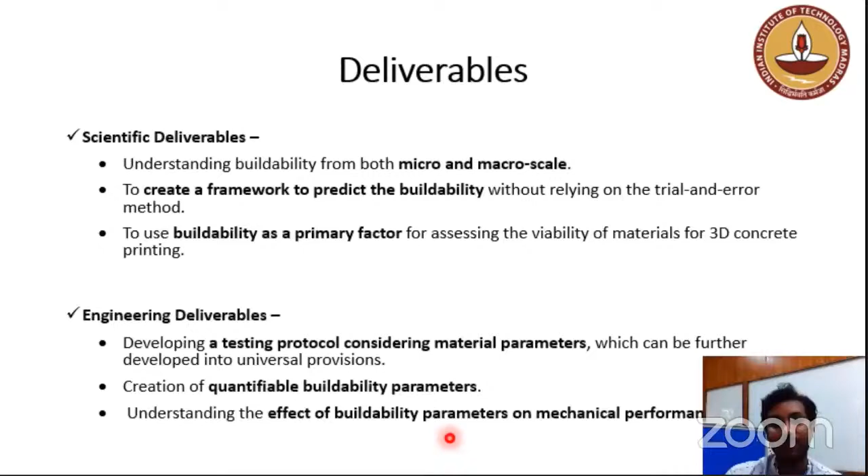Now, the engineering deliverables are to have a testing protocol considering material parameters, to have quantifiable buildability parameters, and to see the effect of buildability parameters on mechanical performance or strength performance of the structural part. So the basic objective of the total study is, again, to understand the fresh state and the material parameters that are critical for buildability.

To use different admixtures like accelerators, to increase the buildability or decrease the deviations we can get while printing it.

From microstructure, we can understand the microstructural evolution with the material parameters that are critical for buildability. To introduce sustainable binder systems that have good properties, like yield stress, that can help us have a stiff mix to hold or support a proper built structure. Systems like calcium sulfoaluminate or limestone calcined clay cements can increase the aggregate-to-binder ratio, giving higher strength and a stable solution.

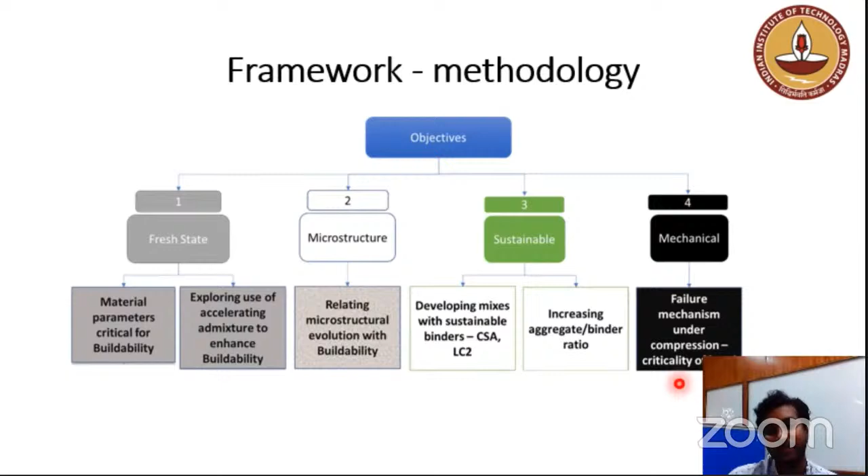And at the end, to understand the failure mechanism—how the criticality of the layers and the bonds is going to play the major role.

So to come to the work progress, the first thing we have done is develop a test method to design a printable mix. I'm not showing it here, but we have developed a whole test protocol to design the printable mix, and if we follow it, we can achieve it.

So we have moved from not-so-well printable structures with deviations to much finer structures that we have printed over time, learning to assess the material parameters and create proper mixes that can be printed in a better way.

Now, to print well built-up cubes using different chemical admixtures is also critical, and to develop a new method to enhance buildability post printing. So we have printed this toilet module using a novel method of spraying accelerator on the surface, which we used to increase the buildability of the structure so that it should not collapse.

So suddenly if something is out of the way, we can use this technique to hold the system, or to freeze the system at that moment, and then rely on building further structures on it without creating a larger deviation or a failure. The next is to print well-shaped cylindrical columns.

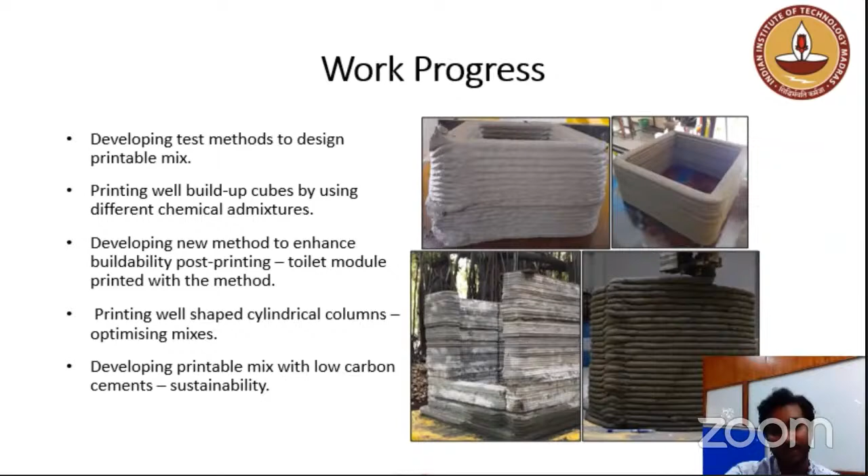We have optimized the mix and created much better columns of half a meter, one meter, in one go. To develop printable mix with low carbon cements like LC2 and CSA, it is under study and being done in the lab now.

Will be taken to the printing trials soon. If you see further, this is the 30-minute building that is there in IIT Madras that we have created using these different technologies, and this is how we have learned to use the accelerating admixtures, from a structure that cannot hold more than 4 to 5 layers to a structure that can go to 600 millimeters or 1 meter in one go.

Also, in different ways how we have added the admixtures like chemical accelerators, we have found out different methods and quantified them and compared them with each other to find out what is the suitable method to do it - to add it at the nozzle, to add it at the mixture itself, or to spray it on the surface post printing to avoid any kind of collapse if there is any problem that has occurred due to printing.

Further, the work in progress is to understand and define the mechanical testing procedure on the hardened state, to have hollow cylinders, to have walls, to understand how the cracks are propagating through the horizontal joints, and whether the vertical joints are critical, the horizontal joints are critical, the layer bonds are critical.

To understand all those things is under progress at this moment, and to increase the sustainability of the printable mix using different binders that is already told to you. The last thing we are also trying to understand is the rheological and mechanical performance under different loading conditions, like binders, admixtures, and all these things.

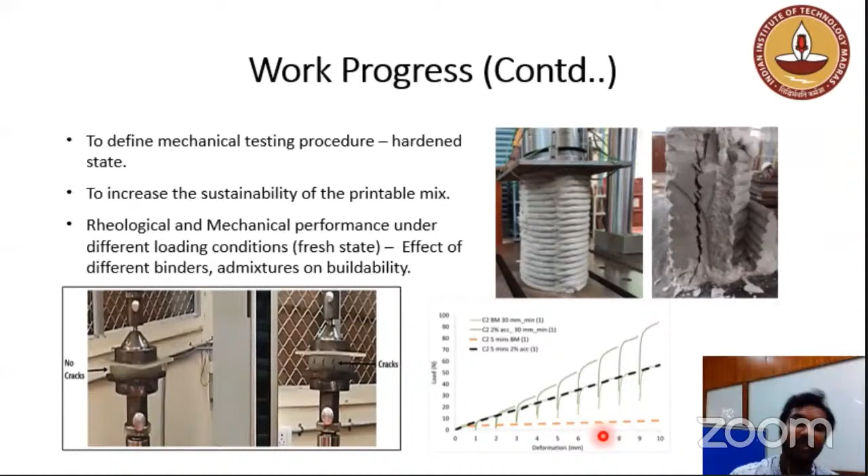So this is a squeeze flow method that we are using to understand the behavior of the mix. We go for direct compression, stepwise compression, cyclic compression, to understand how these accelerators and other things affect the material behavior.

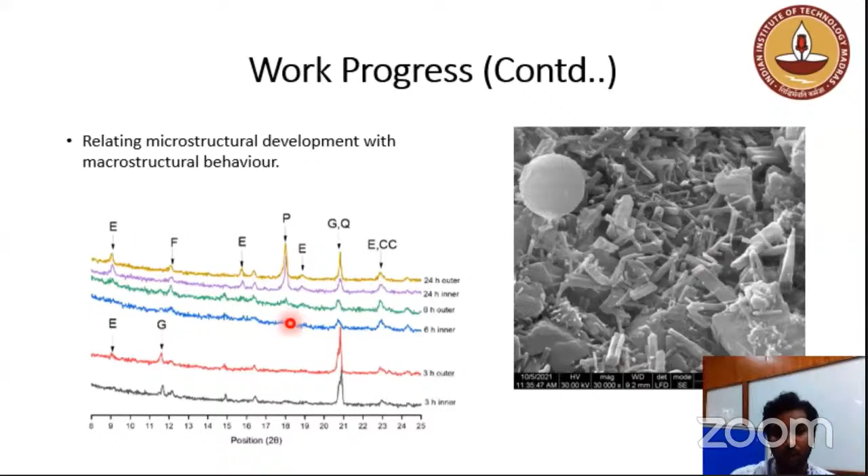So the furthest thing we're doing is to understand the microstructural development, XRD and SEM, to see how the formation of ettringite, formation of CSH, and other things are critical for the macrostructural behavior, or the rheological behavior, and how we can tweak the microstructure. The aim is to know how to tweak the microstructure for better macrostructural performance.

This is the visible output. Thank you.

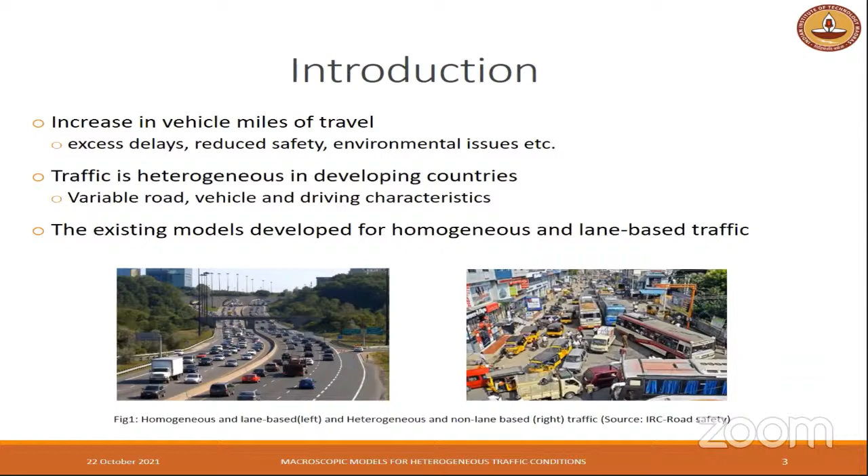So over the years, researchers have developed multi-class models and non-lane based models to accommodate vehicle class heterogeneity. The macroscopic model consists of two main concepts: one is the fundamental diagram, another is the state propagation equation. The fundamental diagram is the steady state relationship between traffic flow variables - speed, density, and flow.

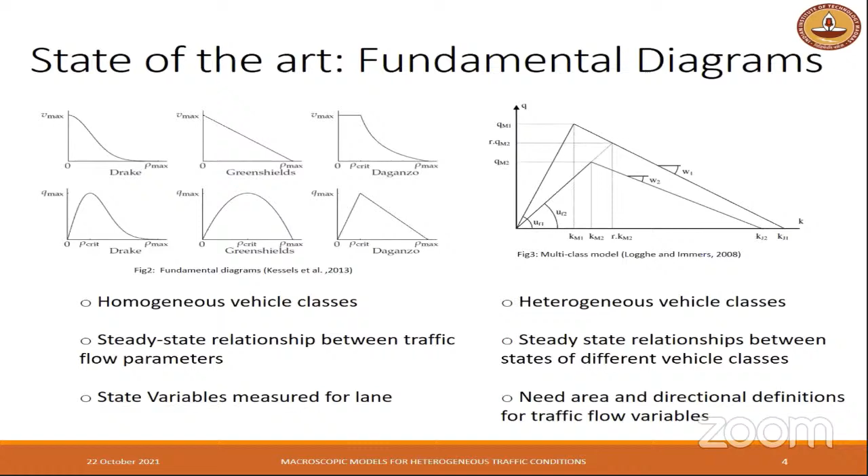The state variables, the traffic flow variables measured for this fundamental diagram, are lane-based. Logghe and Immers proposed a steady state relationship between states of different vehicle classes, called the multi-class model. This is the heterogeneous vehicle class fundamental diagram. But for both cases, we need area and directional definition traffic flow variables, because both fundamental diagrams were developed for lane-based traffic.

The state propagation equation is the traffic flow model. Lighthill, Whitham, and Richards first proposed the kinematic wave model in 1955. The kinematic wave model consists of the continuum equations and the fundamental diagram. The solution of the kinematic wave model gives how the traffic state propagates in the time-space domain.

The first order model, the kinematic wave model, is able to predict state propagation, wave formation, and traffic dynamics at stationary and moving bottlenecks, but can't explain capacity drop, hysteresis, relaxation, and platoon diffusion traffic phenomena. So over the years, higher order models were developed to explain capacity drop, hysteresis, and relaxation and platoon diffusion, which are the drawbacks of the first order kinematic wave model.

This model considers only one direction, the x direction, for traffic state propagation. Lateral movement is not considered in this model. The model does not consider lateral movement and non-lane-based movement. So we need a robust model for mixed traffic conditions.

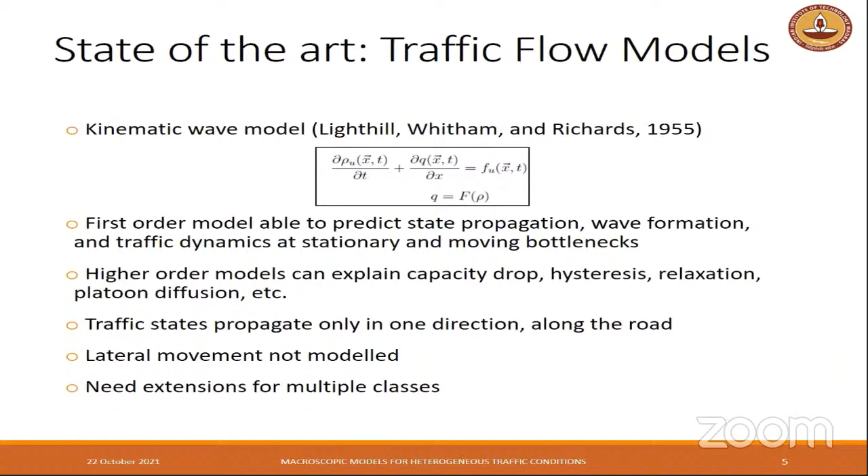Based on a thorough literature review, I came up with a set of research gaps for fundamental diagrams and traffic flow models. The research gap for fundamental diagrams developed for a particular class of vehicle: intervehicular interactions were not considered in the fundamental diagram. Traditionally, passenger car equivalent based fundamental diagrams were developed to accommodate vehicle class heterogeneity, but we need a composition based fundamental diagram to understand intervehicle interactions.

In the research gap for traffic flow, models are developed based on lane-based traffic. They are not developed for area and directional defined traffic flow to understand non-lane-based movement. Traditionally, traffic flow models are one dimensional, that is x and t. So we need another dimension to understand non-lane-based movement.

Based on this gap, I proposed the problem definition and objectives of my research. The problem definition of my research is incorporating vehicle heterogeneity and lateral interactions into the macroscopic model to make them suitable for representing mixed traffic conditions.

The objectives based on this problem definition are: empirical investigation to incorporate lateral interactions in the fundamental diagram for non-lane-based heterogeneous traffic conditions. Objective 2 is to develop a two-dimensional traffic flow model to replicate traffic flow phenomena of different vehicle classes in a non-lane-based system, then develop a suitable first order numerical solution for the two-dimensional kinematic wave model, and then validate the proposed model with empirical data.

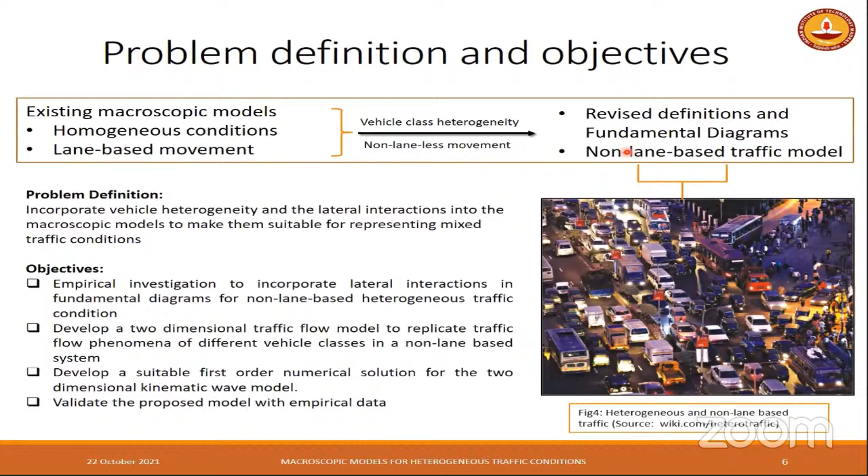Now I will discuss the methodology of my research. The first step is data collection of macroscopic traffic data, the trajectories of mixed traffic. Then analysis of the macroscopic data to estimate the traffic state and vehicle class interactions. The composition specific fundamental diagram estimation to incorporate the lateral interactions.

In the traffic flow model development for non-lane-based movement, anisotropic conditions will be satisfied and the area occupancy conservation equation will be incorporated into the conservation equations. And lastly, development of a first order numerical solution to solve the traffic flow model.

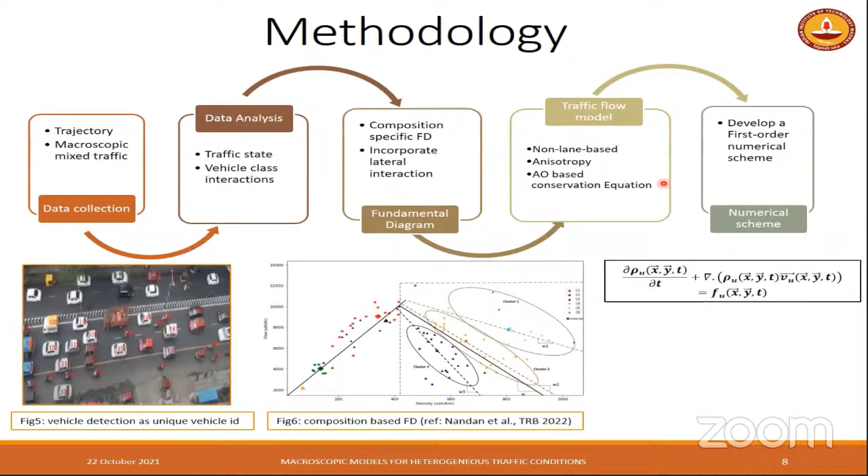Objective and methodologies: I collected 1.5 hours of video data of two-lane, two-way traffic on Sardar Patel Road, Chennai, during an evening peak hour. The trajectories were extracted using machine learning and deep learning algorithms. Figure 7 shows the trajectories of different classes with their instant speed.

Then I analyzed the data over a 20-meter detector. First I calculated the class specific speed, that is VijK. Then VjK is the stream speed, which is the density-weighted proportion of the class specific speed. Then the stream flow and stream density, from which I calculated the area occupancies.

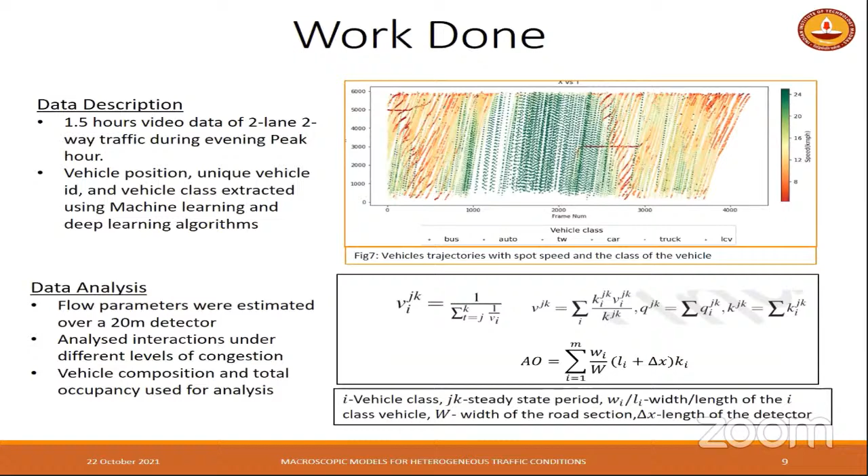So I proposed a methodology to estimate the composition specific fundamental diagram based on the Gaussian mixture model, where the model takes input vehicle proportion of two-wheeler, car, heavy vehicle and auto. But the traffic proportion based Gaussian mixture model clustering leads to a weak classification of congested regime data.

Then I proposed a state optimization technique for the congestion regime data over the Gaussian mixture model. Upon converging of the state optimization technique, we observed different wave speeds for different traffic compositions. So the fundamental diagram that we proposed has only one linear relationship between flow and density in the free flow region for different traffic compositions, whereas different wave speeds exist for different traffic compositions in the congested regime.

Showing the relationship of stream speed versus area occupancy for different compositions of the stream. As you can see, for two different compositions A1 and A2, stream speed is non-increasing and non-linearly related to area occupancy, where the magnitude of speed for different compositions differs for a particular area occupancy value.

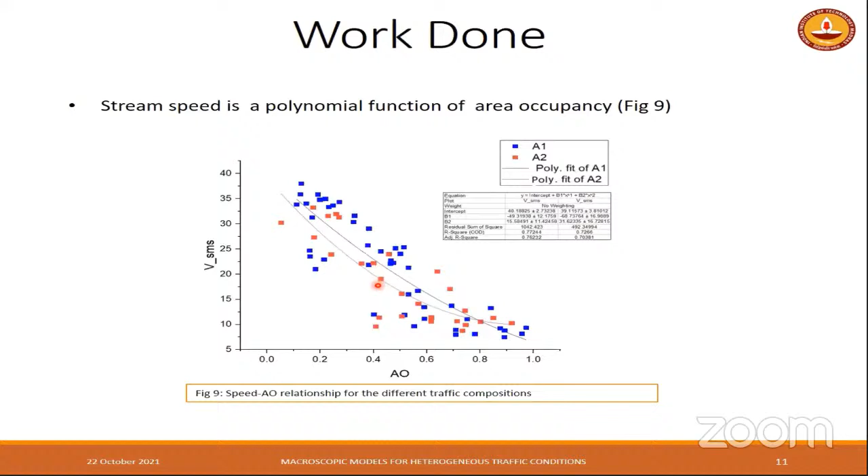As part of my work, I have developed a composition specific fundamental diagram using the Gaussian mixture model and the state optimization technique. As we have already seen, the single linear relationship between traffic flow and density in the free flow region for different traffic compositions allows us to conclude the mean speed for different composition classes is equal.

And in congestion, the wave speeds are different for different compositions. So wave speed for a higher proportion of heavy vehicles is higher. So if C2 has a higher proportion of heavy vehicles than C1, then we can prove that delta Q by delta K, that is the wave speed for C2 composition, is greater than the wave speed for C1 composition.

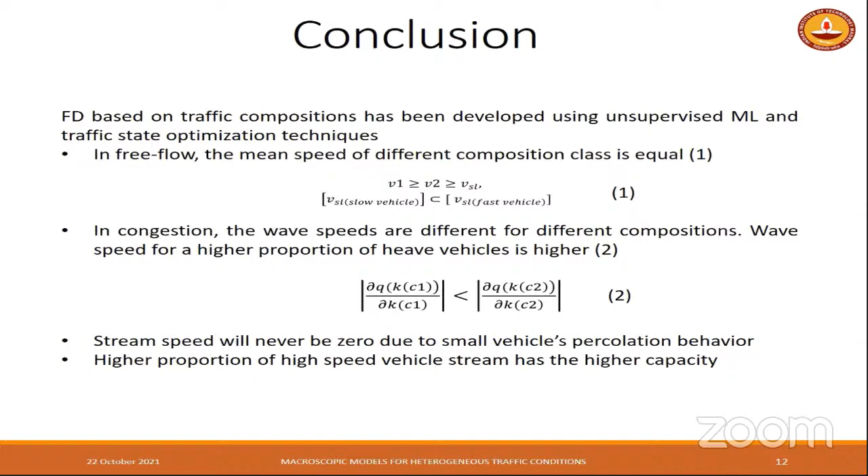Then the stream speed will never be zero due to the percolating behavior of two-wheelers. So if the stream has two-wheeler proportion, the stream speed will never be zero. Then a higher proportion of high-speed vehicles like two-wheelers and cars leads to higher capacity.

From the remaining objectives, the proposed future work is the development of a traffic flow model for non-lane-based heterogeneous traffic conditions, where we'll incorporate both the x and y directions in the continuum equation. Then we'll develop a first-order numerical scheme. Then we'll validate the model with empirical data.

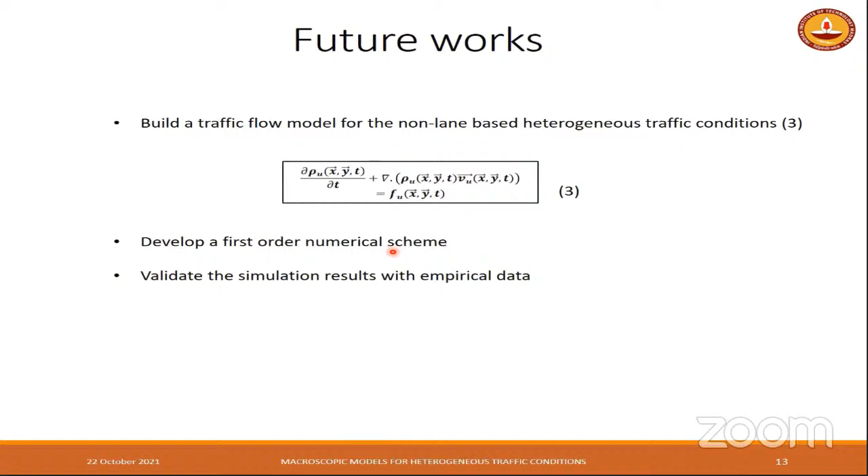Published and under review work are the visible outputs of my research.

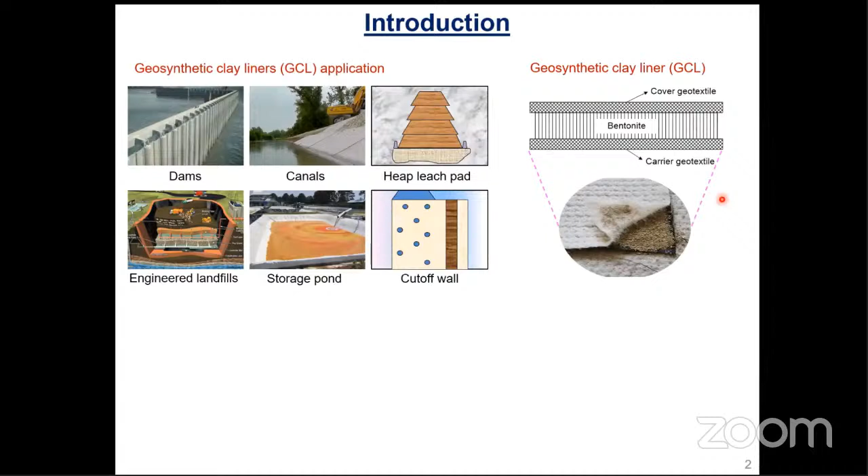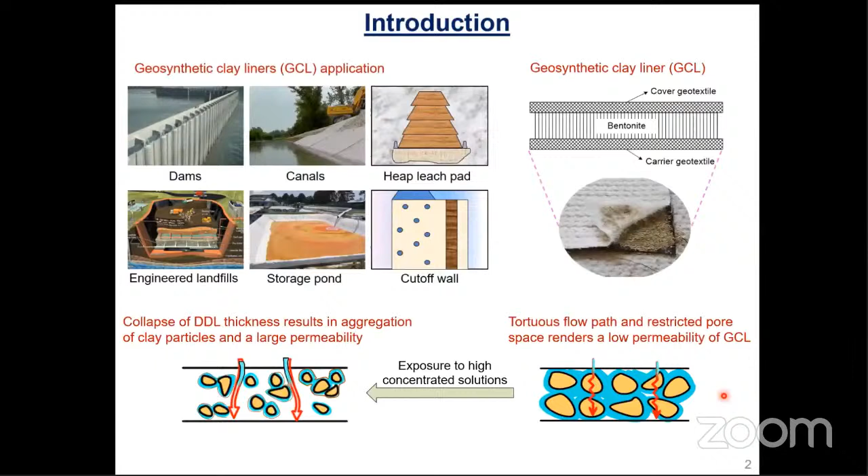Coming to the introduction of the study, geosynthetic clay liners are widely used as hydraulic barriers in many geoenvironmental applications such as dams, canals, heap leach pads, engineered landfills, storage ponds, cutoff walls, etc. GCL is a composite consisting of clay and a geosynthetic material. It consists of a thin layer of bentonite sandwiched between two geotextiles called cover and carrier geotextile. It is relatively impermeable owing to its high swelling capacity and low hydraulic conductivity. But prolonged exposure of the clay to solutions with high concentration can increase its permeability, causing damage to the environment.

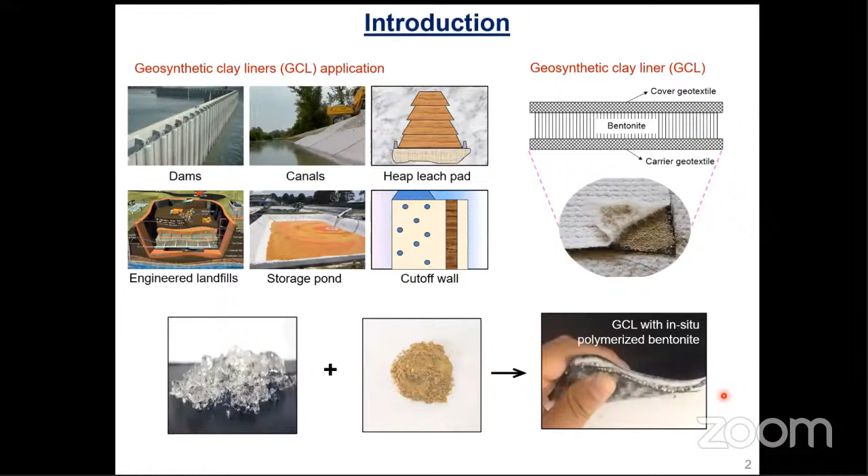This problem is addressed in the present study by modifying the sodium bentonite present in GCL with a superabsorbent polymer by adopting the latest in-situ polymerization technique. Various studies have assessed the attributes for a liner material such as hydraulic behavior, self-healing capacity, sorption ability, and diffusion characteristics. Polymer intercalation and pore clogging is reported as the mechanism for their enhanced properties from a microstructural perspective. These studies showed that polymerized bentonite has superior hydraulic performance compared to the untreated ones.

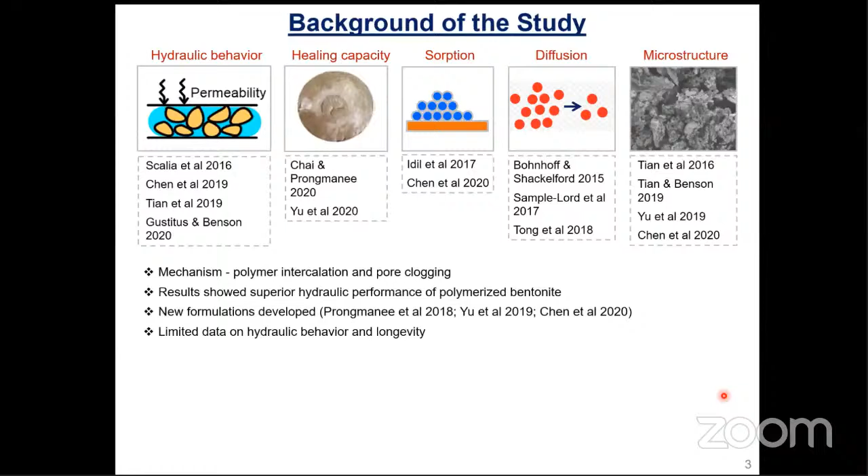Recently, studies have focused attention on developing new chemical formulations for polymerized bentonite. As they are at a nascent stage of research, there is limited data concerning the hydraulic behavior and long-term durability. Based on this, the objectives of the present study are to develop an in-situ polymerized bentonite based on an optimum chemical polymer mix using design of experiments, and to evaluate its swelling capacity under various chemical environments. The materials chosen for this study are sodium bentonite, and the polymer used was polyacrylate.

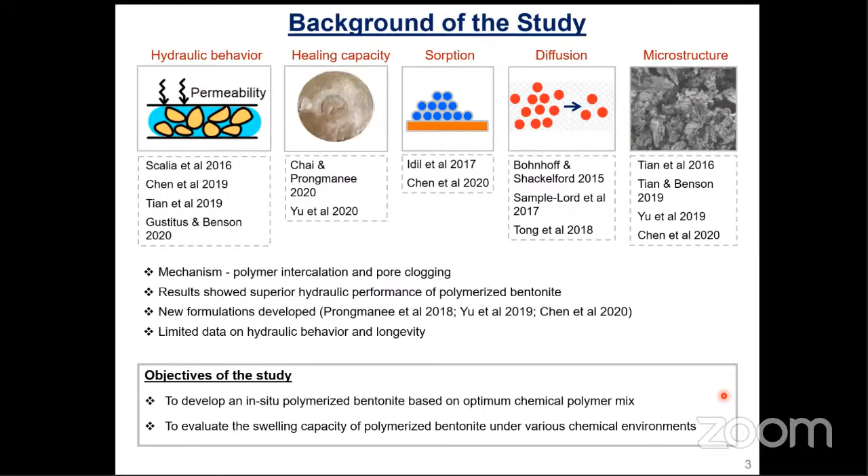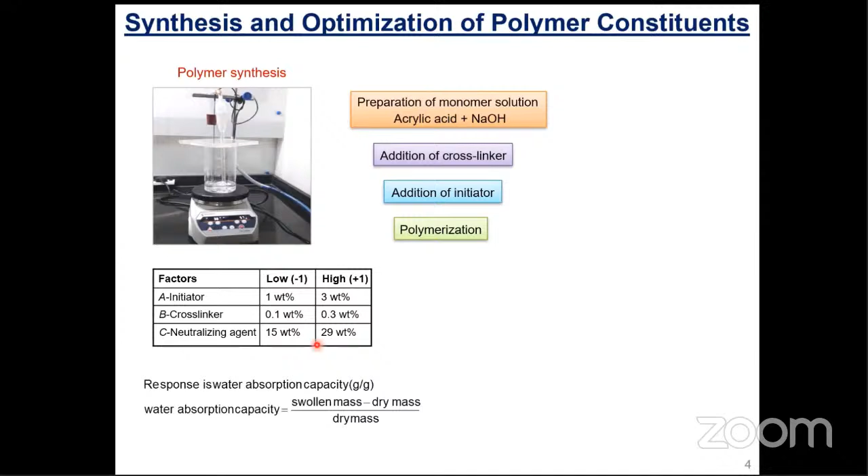So to know which proportion of this chemical mix gives the polymer maximum water absorption capacity, an optimization experiment was carried out using response surface methodology. The factors considered are initiator, crosslinker, and the neutralizing agent, that is NaOH. Their corresponding low and high levels are shown in this table. The response studied is the water absorption capacity of the polymer, calculated using the formula given here.

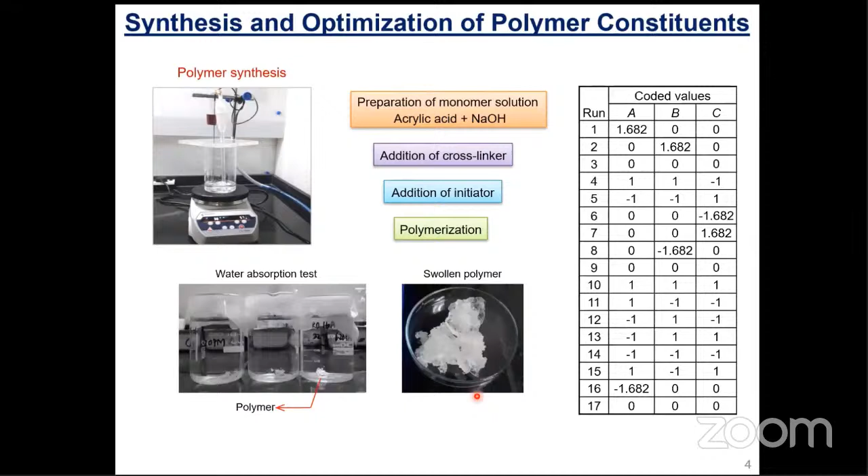Minitab software was used to obtain the design matrix as tabulated here. For all these 17 runs, the polymer was synthesized and its water absorption capacity was measured. The same procedure for polymer synthesis was used, except bentonite was added to prepare the in-situ polymerized bentonite. At the end, the final product was oven-dried and ground to match the required particle size distribution.

For testing, a bentonite polymer composite with 30% polymer content was prepared and its swell index was measured under various chemical environments.

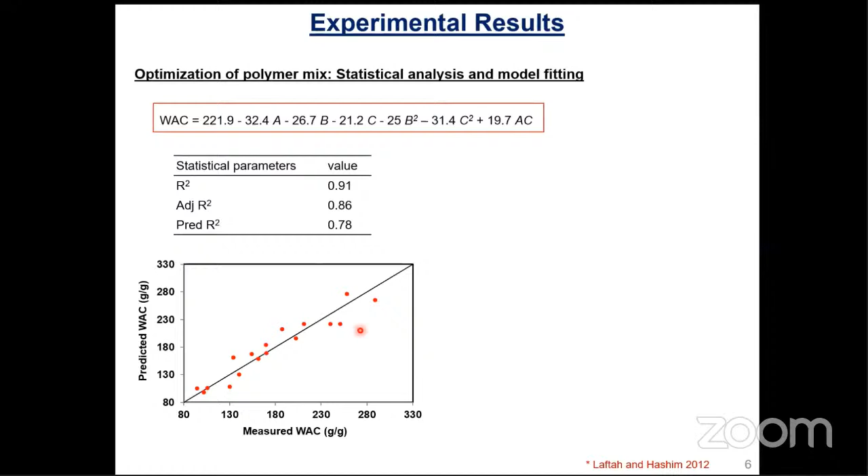This figure shows the predicted and measured water absorption capacity values of the polymer. Here it can be seen that the points are distributed close to the straight line, which confirms the significance of the predicted model.

Optimizer tool from Minitab software was used to determine the optimum proportion of the polymer that gives the maximum water absorption capacity. The results of optimization matched well with the values reported in the literature.

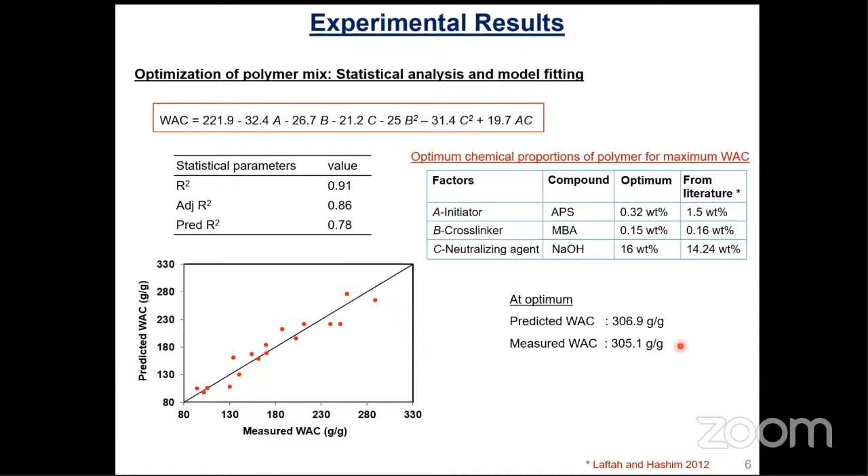At optimum, the model predicted a water absorption capacity of 306.9 gram per gram. To verify this value, the experiment was performed at the optimum and the water absorption capacity of the synthesized polymer was measured to be 305.1 gram per gram. This negligible difference supports the validation of the predicted model once again.

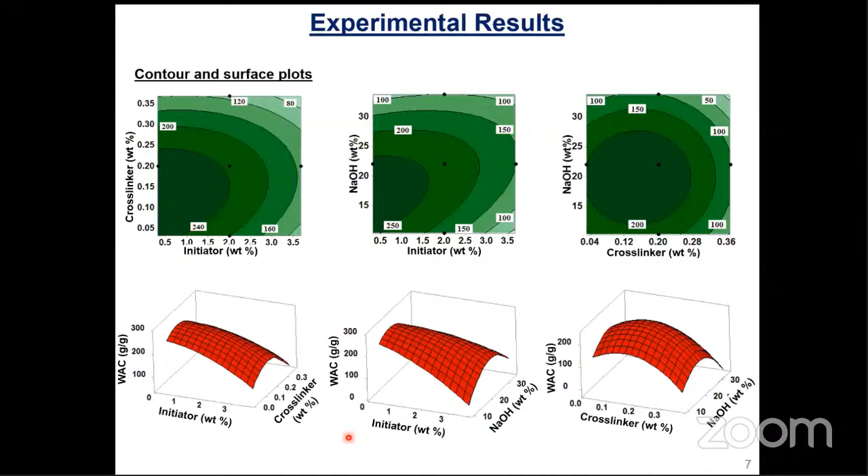A mathematical model was developed for predicting the water absorption capacity of polymer, and its adequacy was verified using the goodness of fit and lack of fit test.

The effect of factors such as initiator, crosslinker, and NaOH was studied using the surface and contour plots, and it was found that the polymer's molecular weight, polymerization rate, the cross-linking density, and the NaOH weight percentage affected the water absorption capacity of the polymer.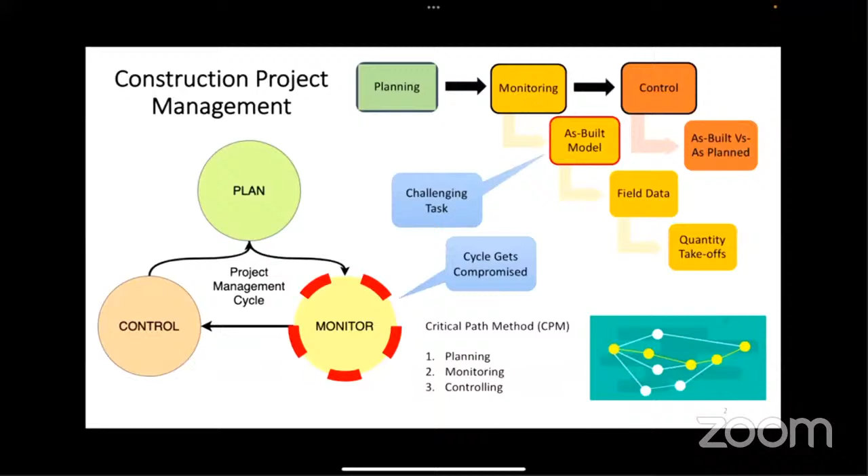Construction project management is a three-step cycle with key components as planning, monitoring, and control. Monitoring is a critical phase, and to monitor we require comparing the as-built progress with the as-planned progress. Hence it requires as-built model generation, which is a challenging task. If the cycle gets compromised, the project runs into time overrun and cost overrun.

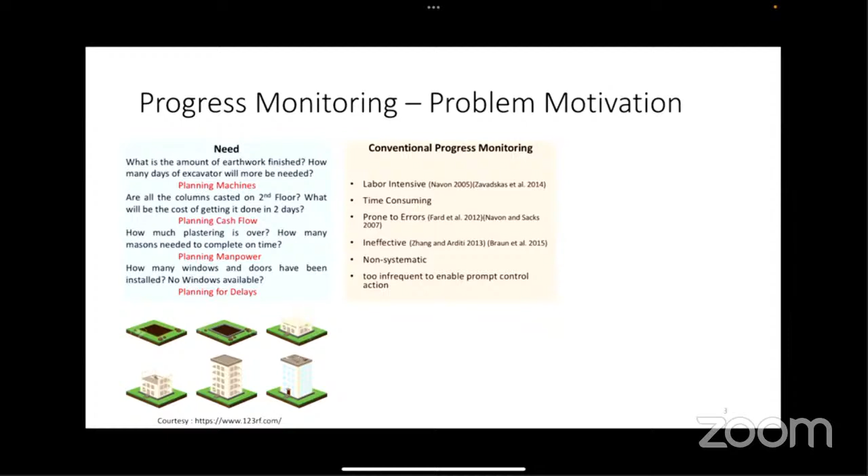The main motivation behind this is that progress monitoring is used in many things like machine planning, cash flows, manpower, and delays. Conventional progress monitoring, generally a pen and paper based method, is labor intensive, time consuming, prone to errors, ineffective, and therefore non-systematic and too infrequent to enable prompt action.

The newer technologies like laser scanning, photogrammetry, videogrammetry, and range imaging have been the newer version of technology used for progress monitoring. The use of these has been increasing because the use of cameras and laser scanners has been increasing worldwide, along with the decrease in cost and the improved processing capabilities.

I start with the literature review where I systematically classified the existing studies on progress monitoring based on what technology they have used, whether they have integrated a BIM model in it or not, and what stage they have done the progress monitoring in, shown in the last column.

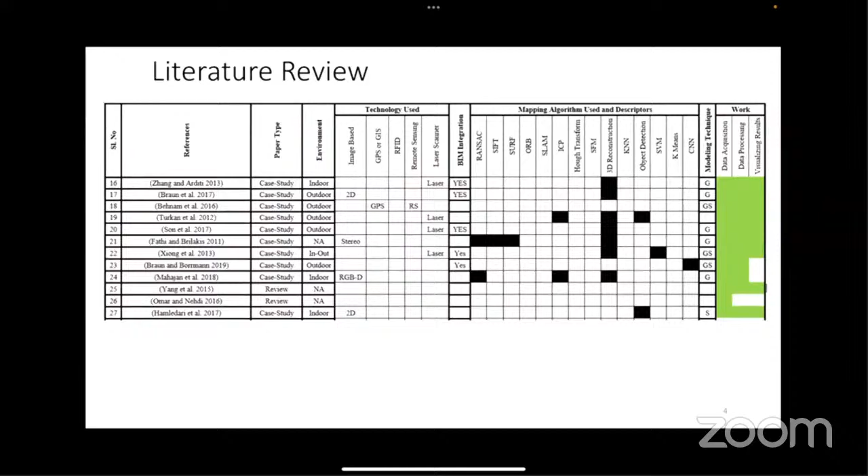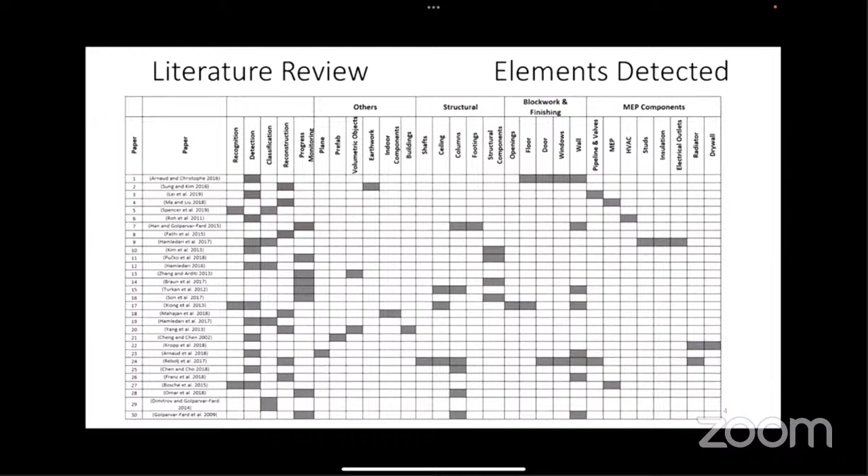I also explored in these studies how many elements have been identified in a building. As you can see, there are structural elements that have been identified, MEP components, blockworks, etc.

So from the literature review, the conclusion is that there is no comprehensive framework, no benchmarking study or test bed, and deep learning based techniques have been sparsely explored.

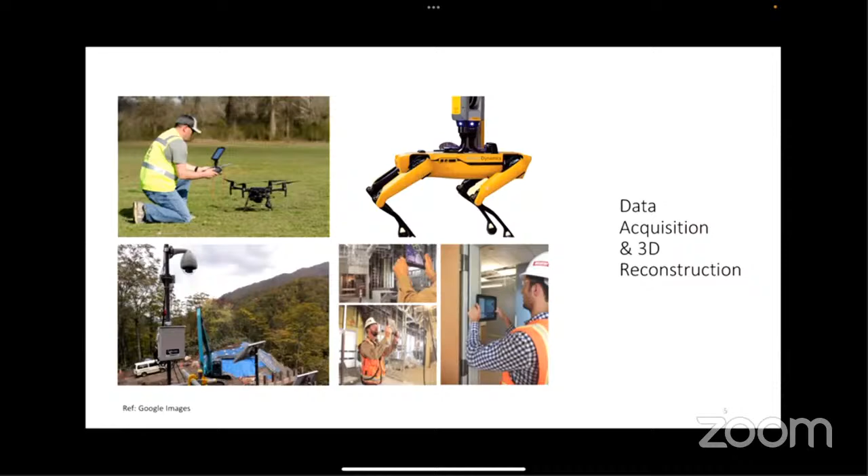So the progress monitoring framework is a 3-step process which I derived from the literature. First is data acquisition and 3D reconstruction, which can be done through multiple techniques. Second is as-built modeling, where many types of as-built models can be built and used for progress monitoring. And finally, progress estimation, where various phases of progress can be shown based on either overlapping or quantity estimation from existing methods.

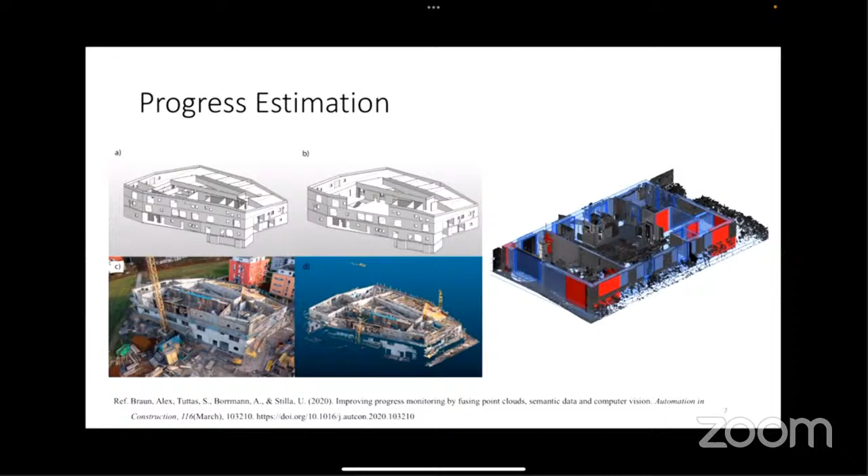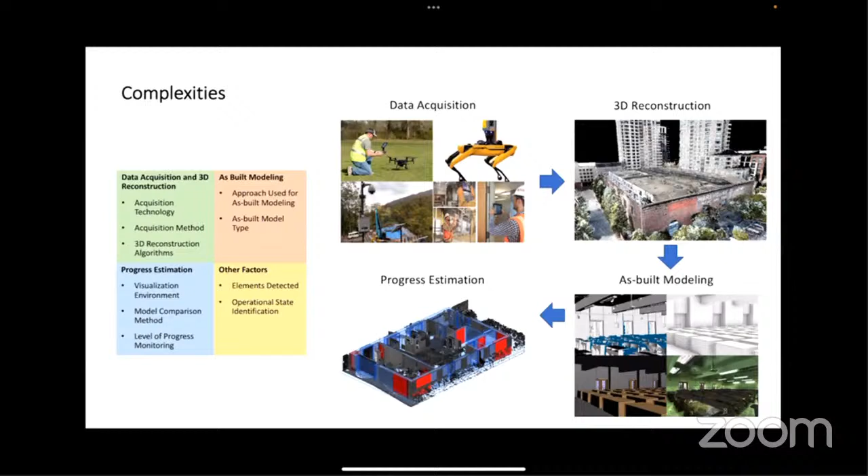So this is the entire process. As you can see, this process is quite complicated because in the first step there are various acquisition technologies, methods and algorithms. In the second process, as I mentioned, there are multiple types of models. In progress estimation and quantity estimation, there are various methods, and finally pipelines have detected various kinds of elements, etc.

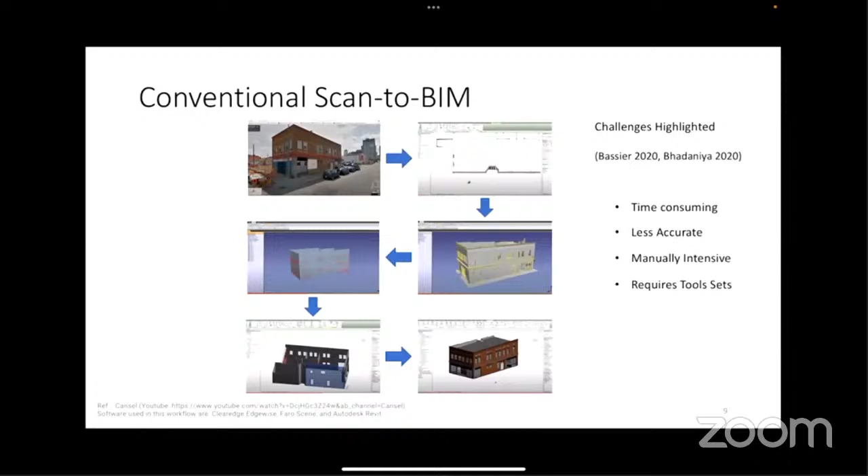In addition to this, conventional scan to BIM is actually used currently at construction projects. In conventional scan to BIM, a point cloud model is scanned, and manually the walls, windows, and floors are built in the computer. So the challenges are: it is a time consuming process, it is less accurate, it is manually very intensive, and it requires tool sets and therefore domain knowledge to use them.

Also, there are various kinds of technologies available in the market for progress monitoring, which vary on cost, mobility, training requirements, etc. To benchmark these technologies, we don't have anything. So hence, this is one of the gaps.

Hence, the objectives of my research are: to evaluate existing solutions for progress monitoring using actual site data and challenges faced to adopt the advanced techniques; to assemble an integrated framework for vision-based progress monitoring in construction; to develop a pipeline for automated capture of elements using heuristics and learning-based methods; and finally to design an experimentation testbed for automated progress monitoring.

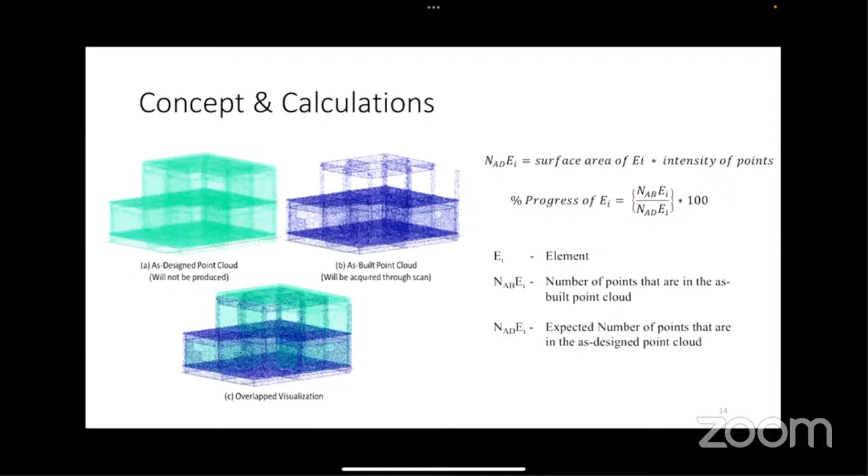So the concept behind this is, in blue you can see an as-built point cloud which is directly taken from the site, acquired through scanning. The concept we are using here is that we will compare the number of points per element on this point cloud with the number of points on the as-designed BIM. This will be extracted from the as-planned model of the building, which is a BIM model, and we will create the points of equal intensity. So by dividing the number of points per element, we will get the progress about each element. You can see the overlap visualization here. This was done using Grasshopper 3D scripting, and here is one more model.

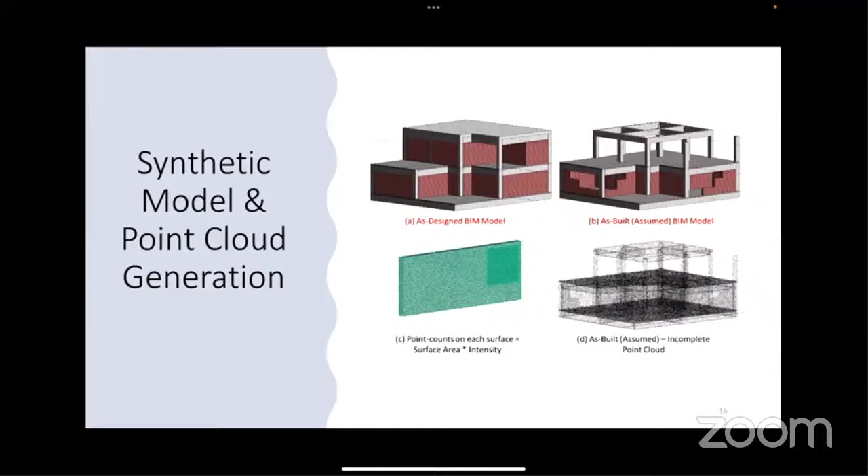This is a synthetically generated model of the as-built BIM model, and this is the as-designed model. We compare the number of points based on equal intensity. Point intensity is defined as the number of points per unit surface area. So we compare the number of points in each element and get the progress.

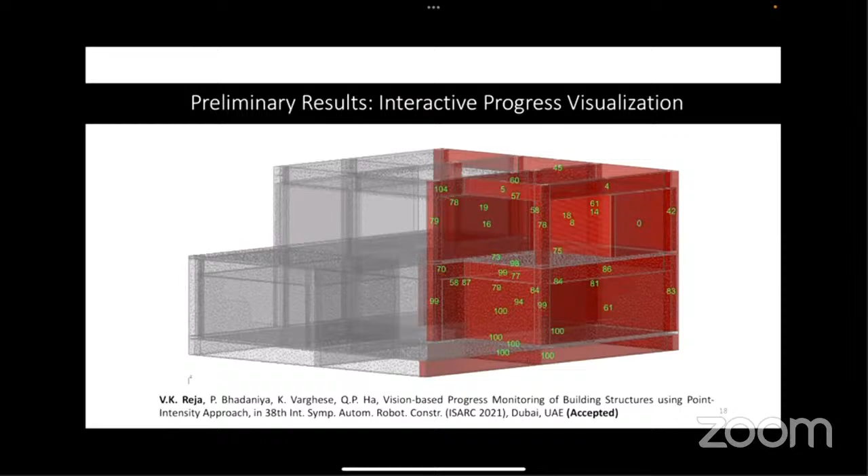This work has been accepted at the International Symposium for Automation and Robotics in Construction in Dubai, and these are the preliminary results. This report, you get in one click.

The expected contributions of this research are, first, to generate a process framework for computer vision based construction progress monitoring, using a heuristics based approach, which I have already done, and a learning based approach in conjunction to see the result, producing our benchmark dataset and test bed. Secondly, an easily implementable approach for the construction industry which they can use on site, along with guidelines to adopt computer vision based progress monitoring on construction sites.

This is my research timeline. I have completed my research proposal seminar and candidature assessment 1 and 2 at UTS, University of Technology Sydney, and IIT Madras respectively, and now I am planning to work towards my remaining objectives 3 and 4. I have spent 1 year of my research doing joint doctoral work virtually with Professor Quang Ha, and I will continue in online mode, and I plan to submit my thesis in mid-June next year.

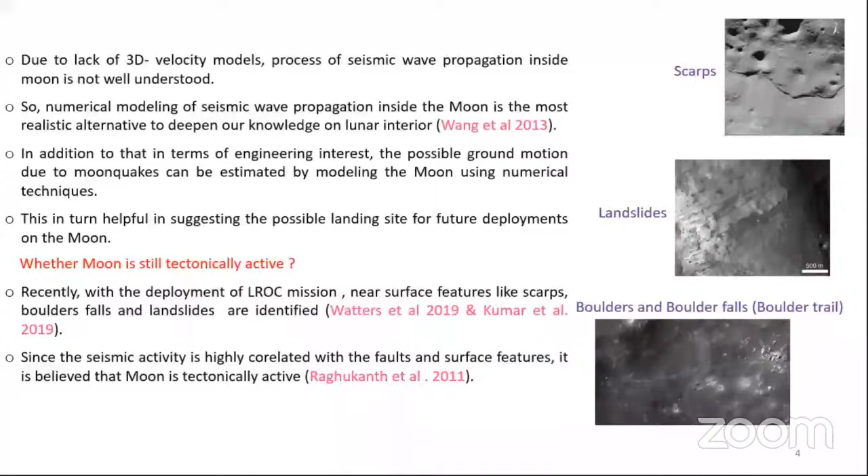Whether the moon is still tectonically active or not is not known. Recently, with the deployment of the LROC mission, near surface features like scarps, landslides, and boulder falls along with boulder trail marks were identified with the help of high resolution images. Since the seismic activity is highly correlated with such faults and surface features, it is believed that the moon is tectonically active.

So, after understanding the drawbacks in the available numerical models for the moon as well as the research gaps in the literature, the following objectives were framed.

The first objective is to develop a spectral element model in order to study the global seismic wave propagation in the moon. In this, the global model will be developed and compared with normal mode techniques as well as with the Apollo data in order to validate the model.

Finally, peak ground velocity contours and peak ground residual displacement contours were generated over a region in order to determine the possible ground motions for a shallow moonquake.

After this study, in order to overcome the limitations in the developed spectral element model, a second objective is framed. In this objective, hybrid broadband ground motion simulations are simulated for the moon, in which low frequency and high frequency ground motions are simulated.

In addition to that, in order to generate the high frequency ground motions, a parametric study on the scattering properties of the moon will be performed.

Once the broadband ground motions are generated as an inverse problem with those simulations at various epicentral distances, how much PGA is required to topple or overturn a boulder will be estimated as an application to this objective.

Further, once PGA and PGV are estimated for the moon, a seismic hazard map for the moon will be prepared. For that, initially all the seismically active tectonic features will be mapped to prepare a seismotectonic map for the moon, and finally the possible magnitude that can occur from the faults using the Gutenberg-Richter relation will be estimated.

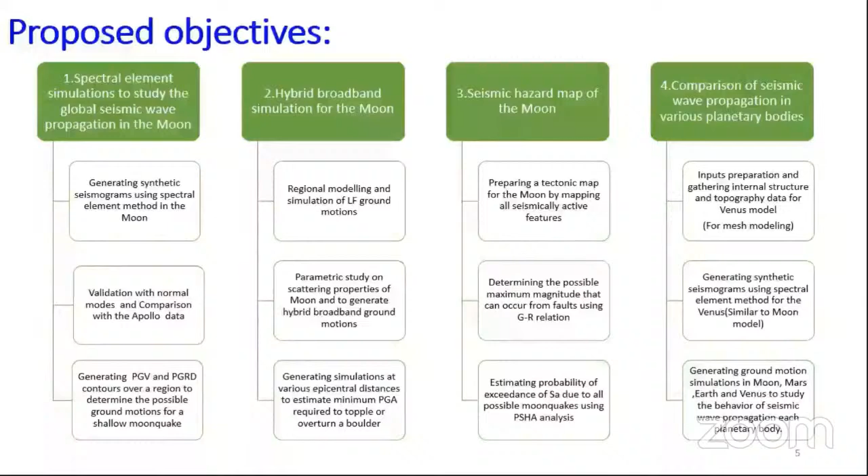So by following the similar methodology of the spectral element method, for the fourth objective, Venus will also be modeled, and the seismic wave propagation in various planetary bodies will be compared and studied. In the following slides, I am going to present a brief methodology and work done for every objective.

Coming to the first objective, already in the literature spectral element models are developed for the Earth and Mars to study seismic wave propagation. So in this study, a similar methodology is adopted to develop the global model for the moon.

It is completely based on the spectral element method, which is derived from the weak formulation of the wave equation, and is a very geometrically flexible and computationally cheap technique compared to the finite difference method and the pseudospectral methods.

So the main or first step in developing a global model is meshing. In meshing, the following parameters are incorporated: the internal structure, which is obtained from the modified Weber-Munk model in the literature, and the ellipticity, which is incorporated by modifying the flattening coefficient. It is observed in the Earth and Mars that long period seismic waves are influenced by rotation and gravity, so both are incorporated.

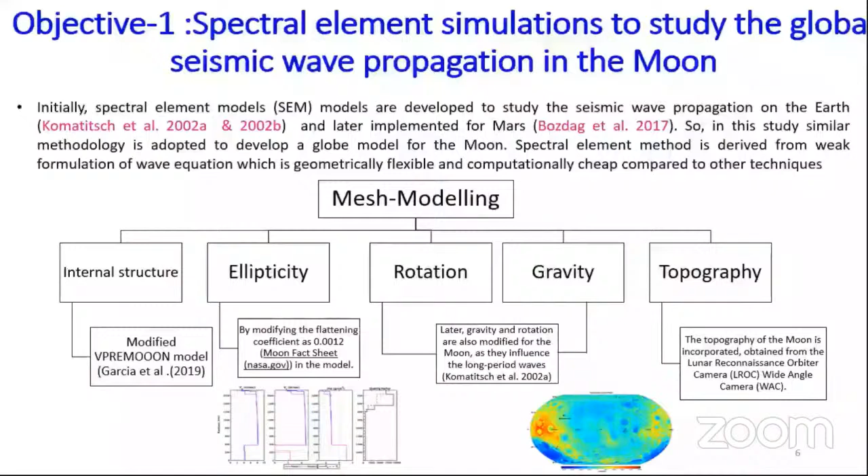And in order to study the role of topography or its influence on the ground motion, a 4-degree resolution of topography obtained from the LROC WAC mission is incorporated in the present model.

Once all parameters are incorporated into the globe, the entire globe is partitioned into 6 chunks using the cubed sphere mapping technique. In each chunk, the radius and the number of layers in each subregion are changed according to the internal discontinuities in the velocity models. It is observed that generally the P and S wave velocities increase with depth, so the size of the mesh or element is designed according to that. But in order to maintain a uniform grid resolution throughout the depth, a stage doubling technique is performed.

From this, each chunk is discretized into 160 spectral elements on either side along the x and y direction, which leads to an element size of 17 kilometers on the surface, and the distance between the two nodes in an element is 4.5 kilometers. In order to maintain numerical stability, the time step used for the model is 0.095 seconds.

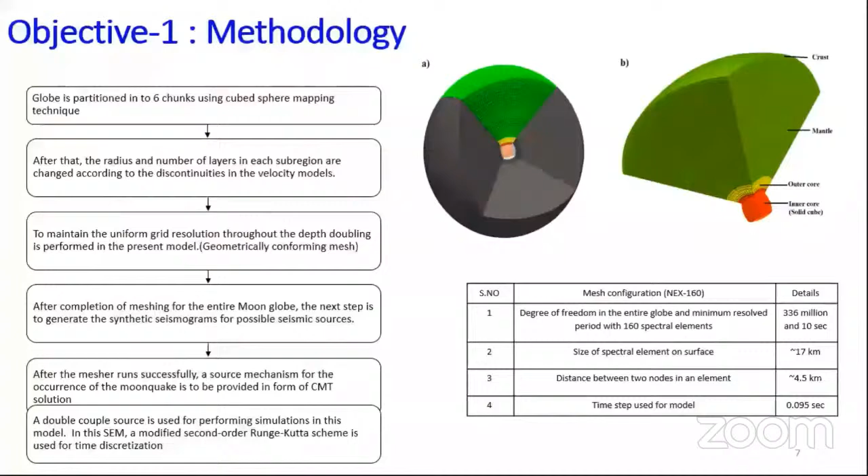Once the mesher runs successfully, the double couple source is provided as a source mechanism in the form of a CMT solution in order to generate the synthetic seismograms for the moon. In the next step, the model is validated with the Apollo data.

The Apollo data is obtained from the DARTS website where the passive seismic experiment data is stored. For validation, an event occurred on March 13, 1973 of magnitude 3.2 is considered, and two different crustal models were used. In the first crustal model, a low velocity layer of shear wave velocity 0.5 km per second is considered, whereas for the second model, an average crustal velocity model is provided.

From the results, it is observed that the low velocity layer model makes it difficult to identify the various seismic phases, whereas in the average crustal model, it is easy to identify most of the seismic phases, and it also shows a similar decay pattern corresponding to the Apollo data.

In addition to the synthetic seismograms, the envelope of the synthetic seismograms and the recorded data are also compared, and model 2 shows better comparisons with the recorded data compared to model 1.

From previous results, it is also observed that even without the presence of the low velocity layer, long reverberating trains are observed. So what is the reason behind those long reverberating trains? Is it due to the topography or the low velocity layer? For this, the influence of topography on synthetic seismograms is studied, and for this a 4.1 magnitude event of 5 kilometer focal depth is considered.

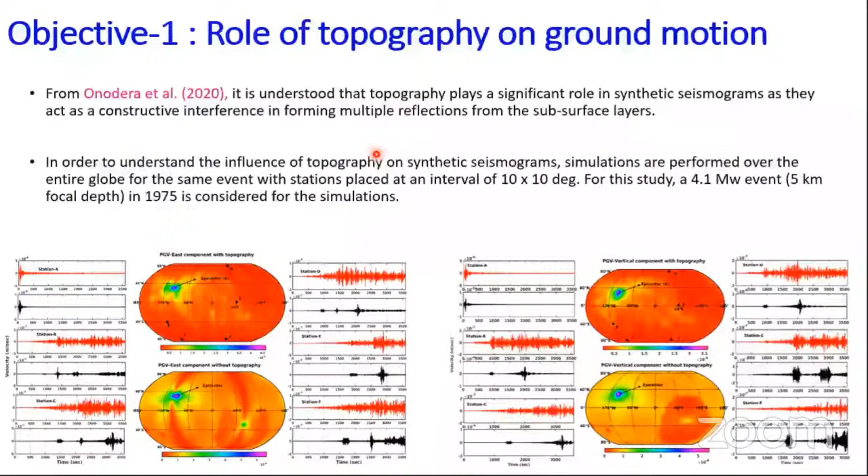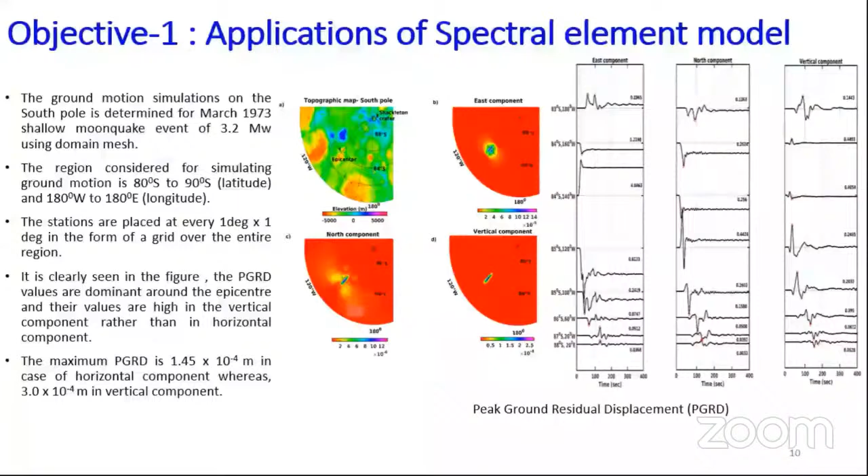As an application of the spectral element model, peak ground velocity contours and peak ground residual displacement contours were generated for the south pole of the moon for a possible shallow moonquake, to understand the influence of the ground motion over a region.

With this, the likely deliverables under objective 1 are completed, except the validation with the normal mode techniques, and that work is currently under progress.

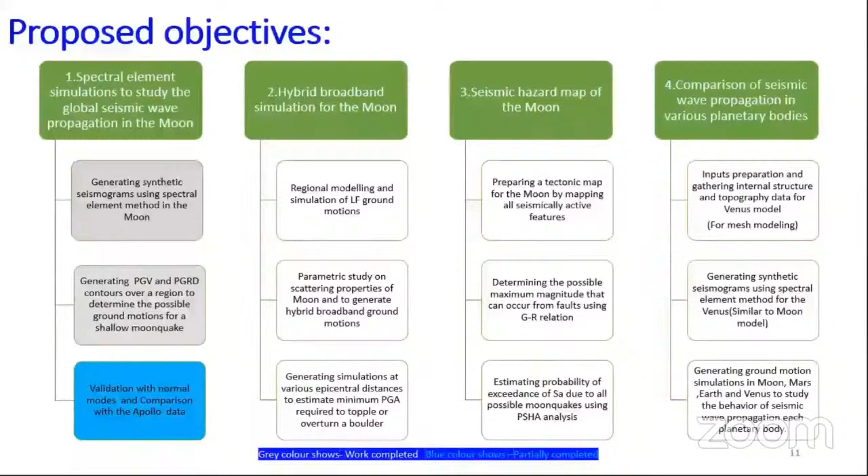Coming to the second objective, the developed spectral element model can generate only low frequency synthetic seismograms and cannot capture the near field effects, as the model has an element size of 17 kilometers on the surface. So in such cases, there is an increasing need to rely on simulated ground motions in the near source regions.

It is also reported in the literature that scattering in the moon increases with increase in the frequency content. This scattering in the moon is due to a layer formed by the irregular distribution of craters and ejecta blocks when the upper crust is fractured.

So both the low frequency and high frequency ground motions are combined together in the frequency domain using an optimization technique at every receiver location to get the broadband ground motion.

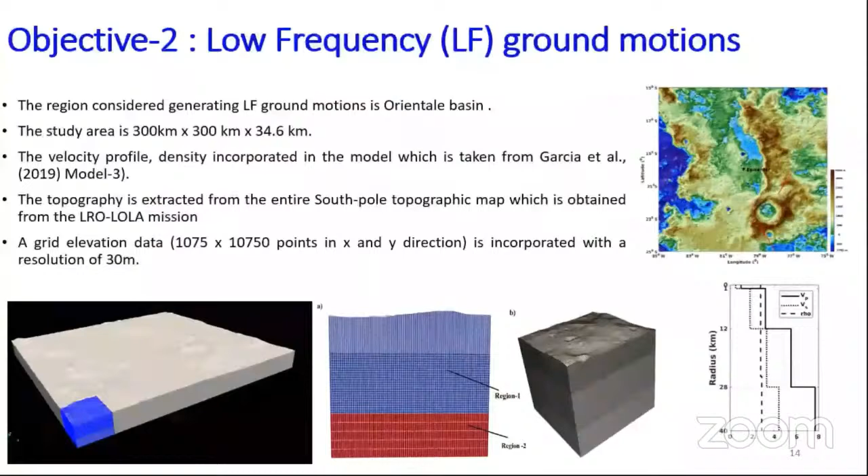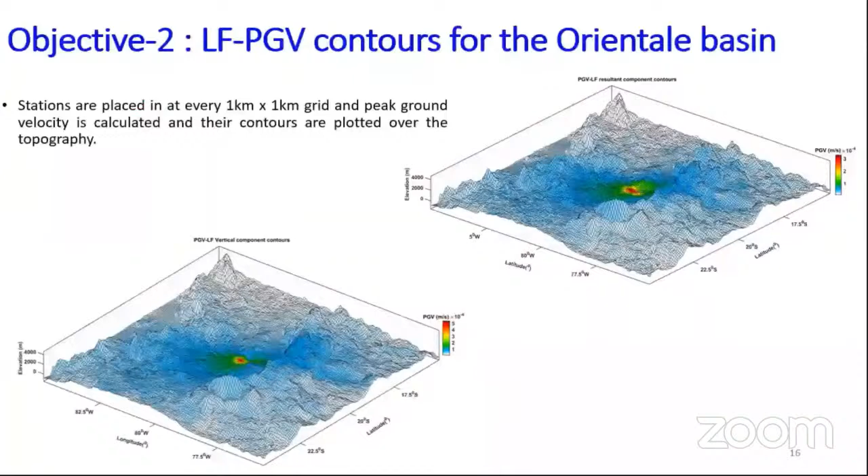In this objective, as a first step, the low frequency synthetics were modeled for the Orientale Basin by incorporating all the material heterogeneities as well as the topography. Simulations were performed at various epicentral distances, and peak ground velocity contours were mapped over the topography.

This was done by keeping the stations at every 1 kilometer by 1 kilometer grid. For those stations, high frequency synthetic seismograms have to be generated, but further scattering parameters are required for the moon. Due to the lack of scattering parameters for the moon, a similar tectonic region is modeled, and those parameters are used for the moon.

For this parametric study, the Koyna region in peninsular India is considered for modeling, and a preliminary study is completed by modeling the Koyna region for the December 10th Koyna earthquake, incorporating a one-dimensional velocity model. The sensitivity study of the scattering parameters is done by matching the recorded data with the simulations, finally arriving at the optimum values of scattering parameters.

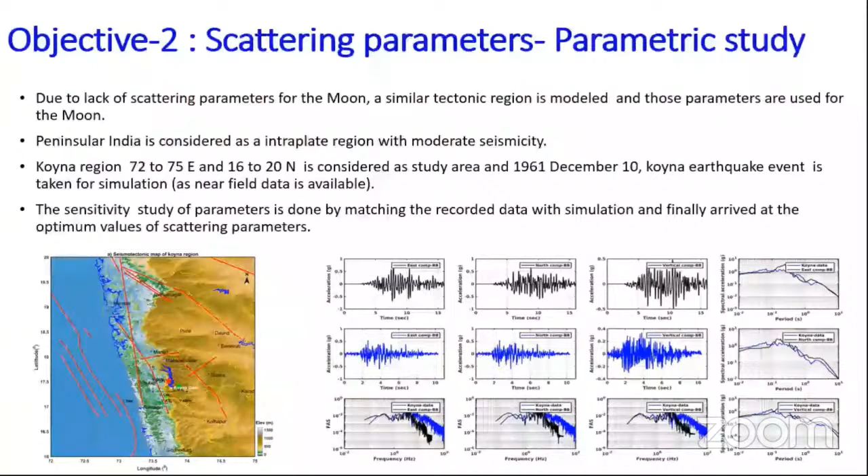But with the recent availability of 3D velocity models for the Koyna region, whether there will be any change in the scattering parameters has to be determined, and this work is currently in progress.

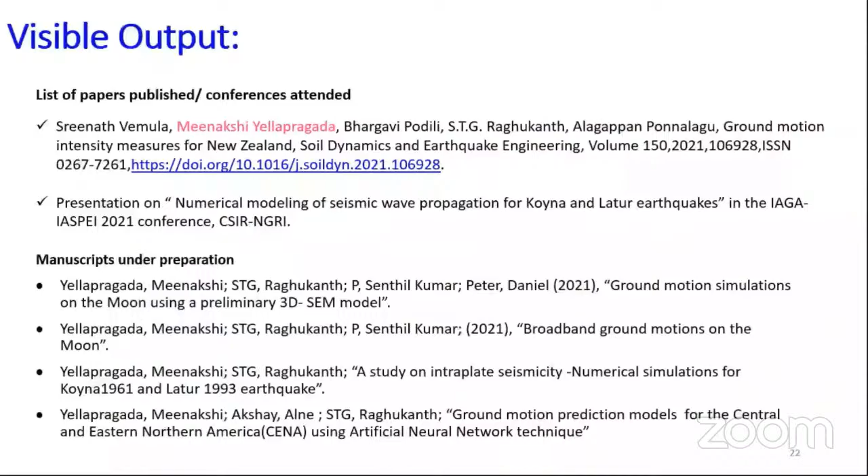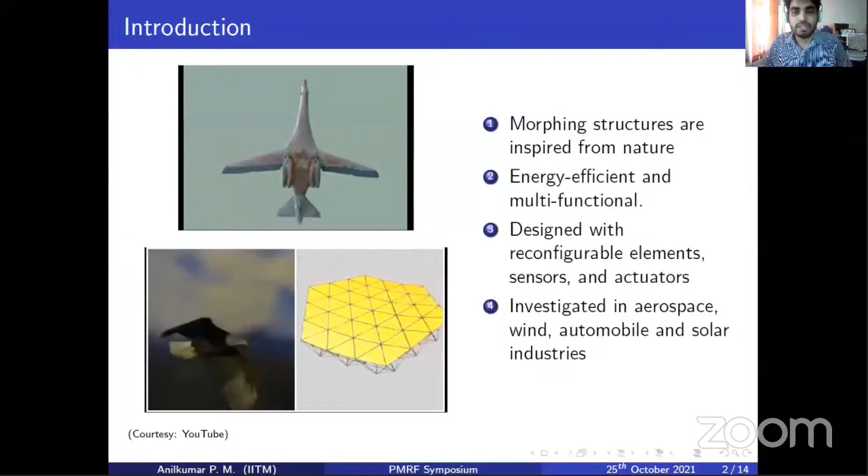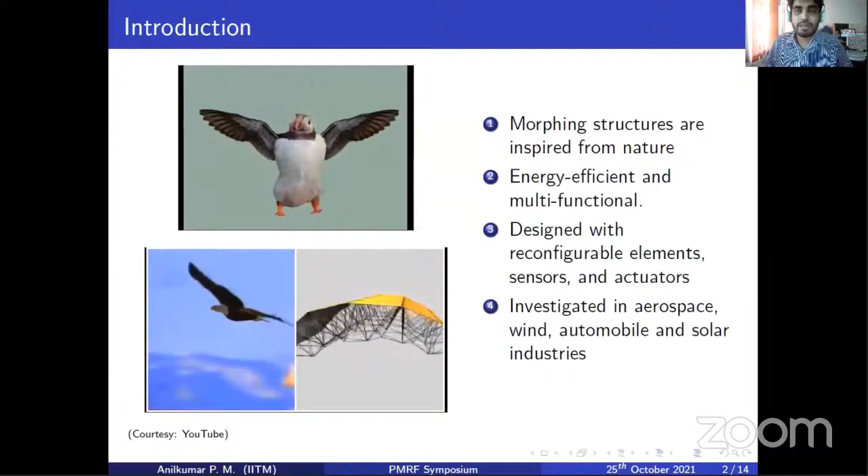So the topic is all about multi-stable morphing structures. Morphing structures are structures which has continuous shape-changing behavior. These kind of structures are inspired from nature. We try to mimic nature's continuous shape-changing transition into our basic structural design to produce energy-efficient and multifunctional designs.

These kind of structures are usually designed with reconfigurable elements, sensors, and actuators. These are being widely used in aerospace, wind, automobile, and solar industries, where we try to mimic nature's continuous shape transition into our design regime.

In order to have continuous shape change, we need to go for morphing mechanism. Morphing mechanism will ensure the smooth transition of the shape. For that, one of the basic requirements is the structure should possess multiple equilibrium positions. If the structure possesses multiple equilibrium positions, we will be able to change from one stable shape to another, to the third, to the fourth. So there is a continuous shape changing phenomena happening.

One of the ideal candidates for this kind of structure is bistable structure. In a bistable structure, mathematically, there will be two stable states separated with an energy barrier. If we are able to give energy inputs to cross the energy barrier, we can change from one stable shape to another and vice versa, which can be used in morphing applications.

One of the conventional examples for bistable structure is unsymmetrical laminate. During the manufacturing process, it will be subjected to a high curing temperature. When we bring down the curing temperature to room temperature, this kind of structure exhibits residual thermal stresses, and it has a tendency to show any one of its stable configurations. It is important to note that these stable configurations are orthogonal to each other.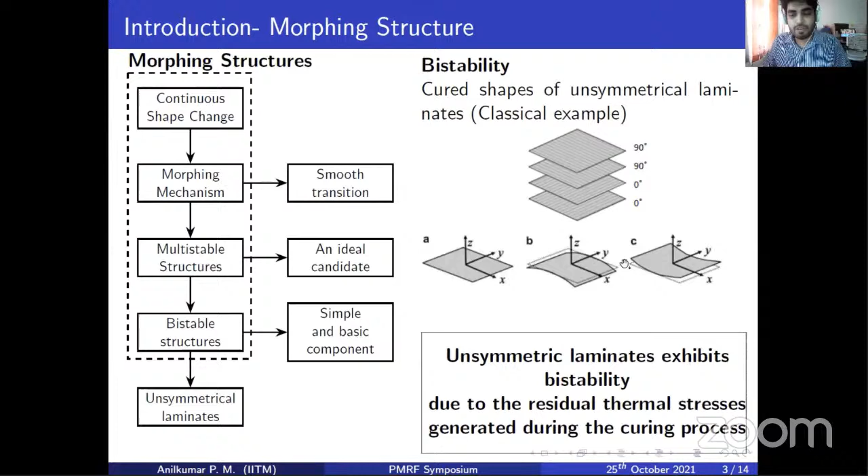These kind of bistable structures are widely used in aerospace structures, reconfigurable structures, solar structures, bionic structures, and other structures like vibration isolation. These have been widely used for the past 3 decades and are actively researched in design applications.

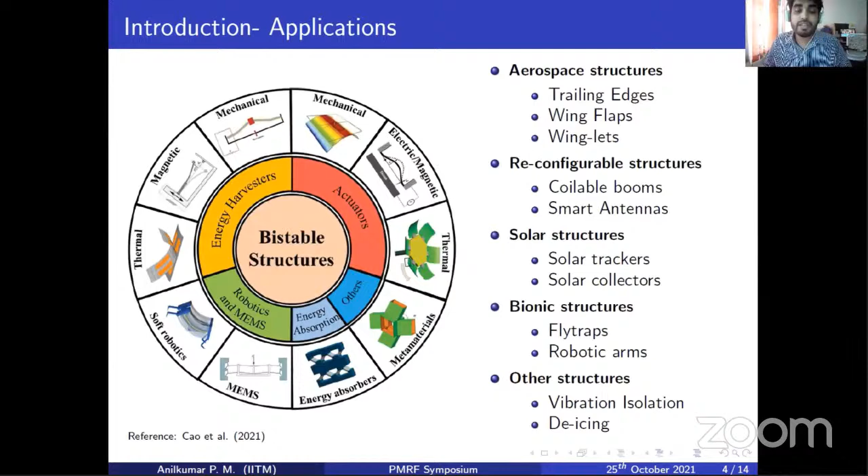So now we know about bistable structure. If there is a laminate which is subjected to a curing process, there will be two stable configurations: stable configuration 1, stable configuration 2. So how to change from stable configuration 1 to stable configuration 2?

This process is known as snap-through. We have to give energy to cross the energy barrier to change the stable shape. We can do it passively using mechanical loads to the stable shape 1 to change to stable shape 2. Then we require additional setup for the same.

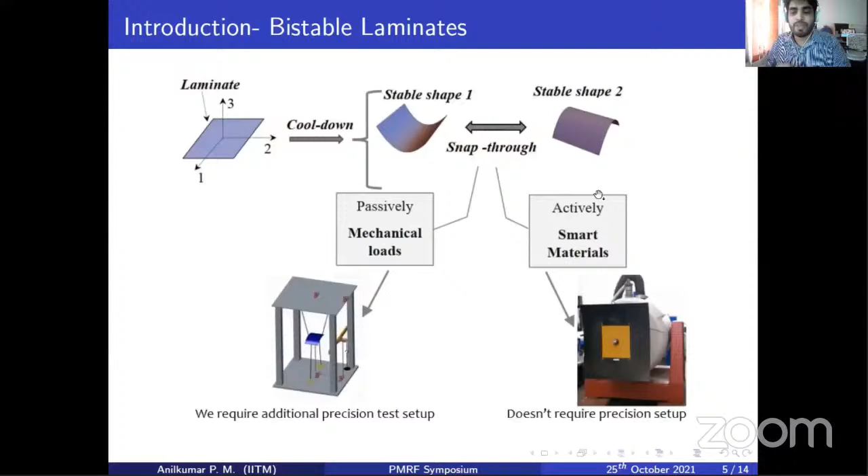Or we can attach some kind of smart materials to the surface of the laminate, and we can trigger the snap-through process, which can enable transition from stable shape 1 to stable shape 2. I will be discussing more about the active methods in the coming slides.

There is excessive amount of research happened from 1981, where Hyer was the first one who identified this peculiar behavior of unsymmetrical laminates, to Harder et al. in 2020, who came up with new techniques for the analysis of such kind of structures.

After doing the literature review, we found that there is a lack of fast and efficient tools for the analysis. In order to design the structure, first we should be able to analyze the structure. If we are not able to analyze the structure, then the design will be more troublesome. So developing an efficient technique for the analysis is of considerable research interest.

And there is a noticeable mismatch with the experimental results. We have to find out what's the reason behind this.

There are large energy requirements to trigger snap-through. If someone says that to change from this stable shape to this stable shape, you need this much excess amount of energy, I won't be preferring those kind of structures. So we need to reduce the energy so that we give small energy inputs to enable the shape transition.

One possible method is from Haldar et al. In 2018, they found that usually in laminates, there will be fiber and matrix. These fibers are usually in the straight direction. If you change this kind of straight fiber to curvilinear fibers, we can reduce the snap-through requirement by 45%.

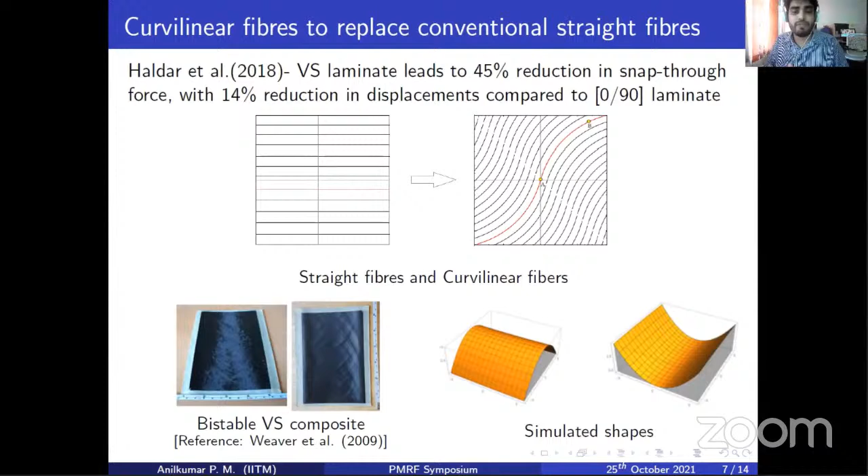So if you need like 1000 Newton load to change from one stable shape to another stable shape, if you use this kind of curvilinear fibers, you require only 550 Newton. So 45% reduction can be obtained without any compromise in the other properties of the design.

And then how to change the stable shape? We can use some kind of smart materials. We can use shape memory alloys, attach them to the structure and heat them, or we can use shape memory polymers, or some kind of piezoelectric material to change the shape.

But there are many problems associated with this. Shape memory alloys usually get overheated. Shape memory polymers are usually very delayed, a too much time-taking process. Piezoelectric materials are usually susceptible to damage, so if you repeatedly do some amount of shape transition, they will get damaged.

As a solution, NASA in association with Virginia Tech came up with a macrofiber composite, MFC. Macrofiber composites are usually a piezoelectric material, but more flexible and high performance. If you attach this kind of MFC to the surface of the laminate and give voltage to it, this voltage will produce electrical energy, which will be changed to mechanical energy.

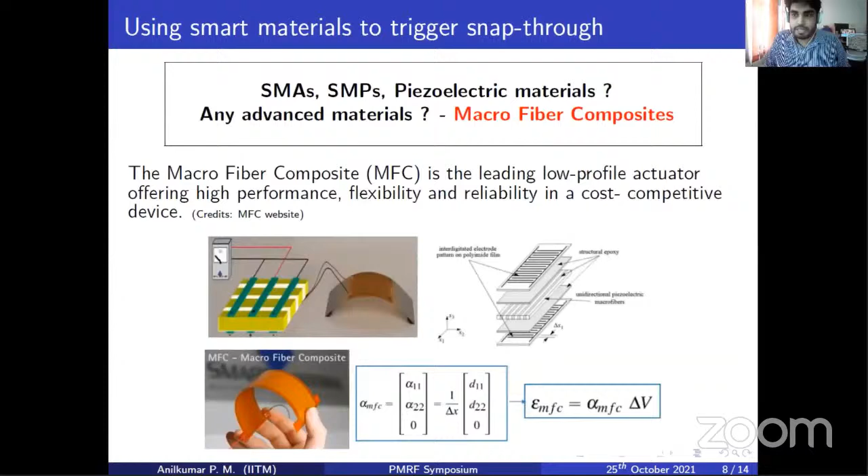This mechanical strain will be transformed to the base structure to change the shape transition. So MFCs are one of the most advanced techniques for shape transition, and can be used at industrial scales. The scope of the thesis is: there is a laminate with two stable configurations, and we have an MFC which can be used for the shape change.

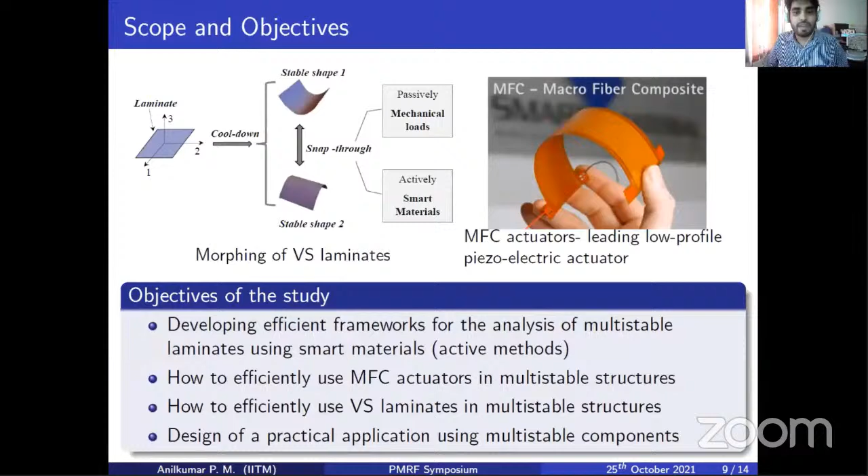The first objective is to develop an efficient technique for the analysis of such structures. Then another objective is how to use MFC actuators in the design for the shape changing process. And how to use variable stiffness laminates, the curvilinear fiber laminates, to reduce the snap-through requirements. Finally, a practical application should be demonstrated.

In the expected deliverables and methodology, we should be able to provide a quick and efficient framework for the analysis of such structures. We should be able to give a multi-stable configuration which requires only minimum energy for the shape transition. And finally, a design of a practical morphing application.

The methodology is divided into three parts. One is using the basic mechanics principles. Basically it's a bistable structure, so the energy principles can be used. We can use the energy minimization principle and develop a semi-analytical framework, which can be implemented in a mathematical software, Mathematica.

Then we can do a numerical framework, a full-scale geometrical nonlinear analysis, which can be done in a finite element software, Abaqus. And we can use experimental validation for the results.

In the methodology, we have two things: a semi-analytical model and a numerical model. In the analytical model, which is basically from mechanics, we need to assume the displacement polynomial. Then from there we find the stress, strain, force and moments, then the total energy of the system, and we have to minimize the total energy to get the stable configurations.

In the numerical model, the Abaqus model, we can directly model the laminate. We get one stable shape, and we keep on giving energy until we cross the energy barrier. We reach the peak point, and suddenly the energy will be sufficient to change from one stable shape to another.

In the finite element software Abaqus, at a time we can get only one stable shape. We are not able to get many stable shapes at once. But from the analytical model, we can get all stable shapes at a time.

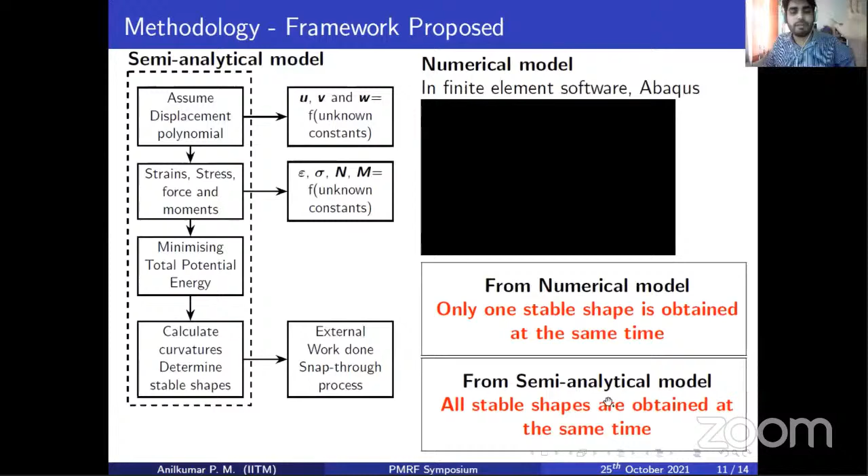The work status is: semi-analytical, numerical, and experimental studies of variable stiffness laminates using MFC actuators are carried out, and the results from the semi-analytical and numerical frameworks are in good agreement with the experimental observations. The first objective, to develop an efficient framework for the analysis of the structures, was completed. The second objective, how to use MFC actuators in the design, was also implemented.

Third objective was how to efficiently use variable stiffness laminate into design. That was also implemented. And the fourth objective on the design of the practical application is ongoing at this moment.

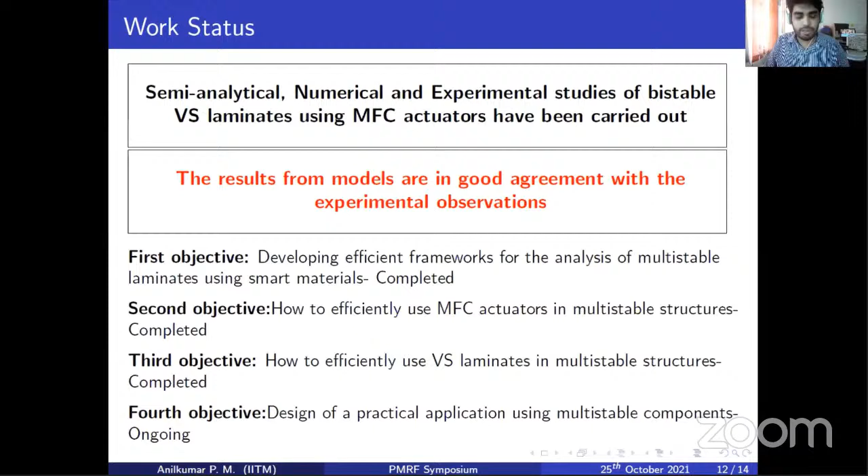Concluding remarks are: an efficient framework for the analysis of multistable laminates using smart materials has been developed, which can be used for future generation in various morphing applications.

Using the design strategy, the energy requirement for shape transition can be reduced by 40%. So if you require something like 1000 voltage for the standard shape transition, using the design strategy we require only 600 voltage. The 40% of the energy requirement can be reduced. So this is a great advantage in morphing applications.

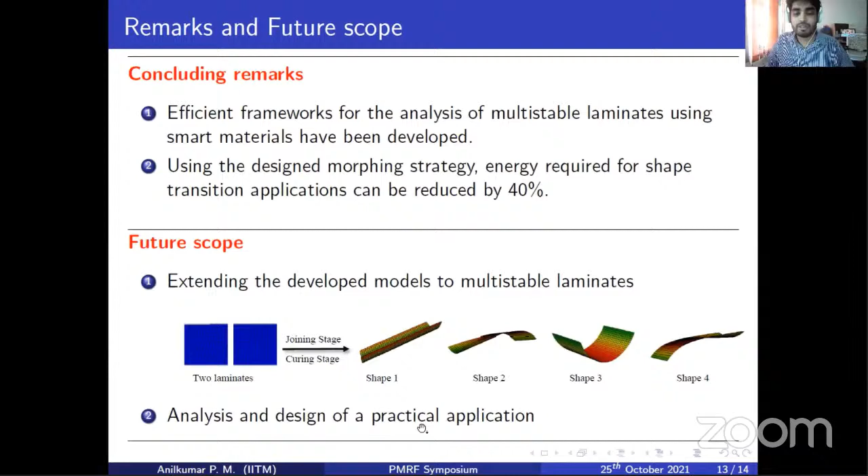The future scope is, now we are discussing only about two stable shapes, one stable shape, second stable shape. We can have multiple stable shapes: 1, 2, 3, 4 stable shapes. Then there is a continuous shape transition, where the structure can be continuously changed from one stable shape to another stable shape. This is of considerable interest. And design of a practical application is also an ongoing process. These are the two future scopes.

There are 3 journal publications and 5 conference publications from the thesis. All details will be available on these websites. Thank you so much for the attention. You may contact me for any clarification. Thank you so much, and thank you.

Thank you, Anilkumar. Thank you.